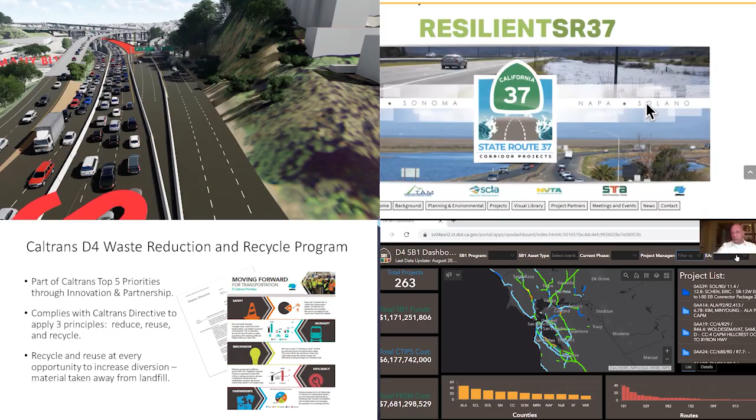24 videos have been produced by your coworkers along with the help from our very own audio and visual staff, highlighting our innovations here in the Bay Area. Every 2 years since 2012, Caltrans has hosted and showcased innovations by staff and programs in our iFair. Previously, the iFair was conducted over 2 days on the 6th floor atrium and on the streets surrounding the District 4 office building here in Oakland.

This year, due to the ongoing COVID-19 pandemic, we decided to innovate and present the iFair in a virtual platform.

Our divisions and programs have created video presentations to share on various topics like interactive web pages with scenario modeling, improved reporting and budgeting tools, enhanced partnering with other agencies for safety and early project completion like we did with the Alemany deck replacement project, greening of our building through refuse separation, pilot studies of new technologies, bicycle transportation and materials, and increased safety solutions for our roadways and the traveling public.

All these innovations were done in an effort to improve safety, be efficient with time and money, and to create solutions to new challenges our district and department have faced over the past 2 years. Enjoy the video presentations and the fact sheets provided on our iFair webpage. Keep innovating and stay safe.

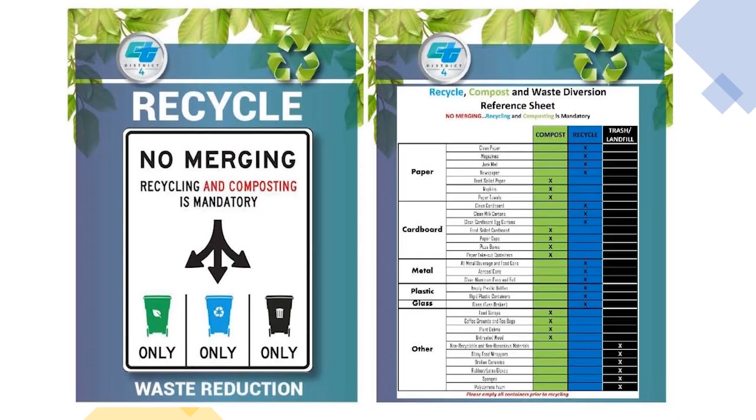The District 4 office building recycling has had a 39% increase since the start of the program. The 4.72 tons monthly recycle pre-program average has increased to a monthly average of 7.73 tons. An average of 44% of our building total waste is diverted into recycling.

Compost has been the largest contributor to our waste diversion efforts. We are averaging 29% of the building waste diverted into compost, 29% of which would have gone to landfill pre-program. Since the implementation of the program, we're averaging 73% of total waste diverted from landfill. We're in line to meet our goal to reach 75% waste diversion by the end of 2020.

The District 4 Waste Diversion Program has been a great success, but we need everyone's assistance to sustain this. We are near our 75% waste diversion goal by the end of 2020, and we can certainly achieve this goal or even surpass it with everyone's assistance and participation.

Caltrans and District 4 Facilities continues its innovation and sustainability efforts to do our part to positively affect our environment and climate change. This is one part of a larger picture, but with all of our contributions, we can continue to develop a sustainable environment for everyone.

Each county may have a different waste diversion program. Please check with your local waste management for details and information on how to extend this effort beyond our workplace.

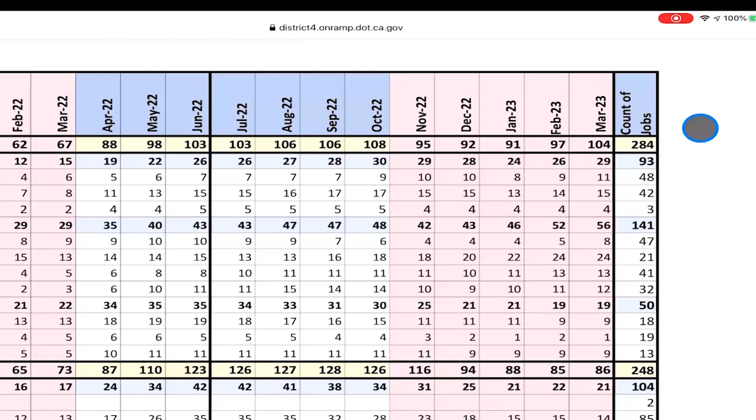The far most right column, Count of Jobs, indicates the number of current and upcoming jobs. For instance, 284 jobs are indicated for Principal Engineer Bill Borman. Bill, along with the other Principal Engineers, Bill Casey, and Bonnie Naga are shown in light colored yellow rows.

Their office chiefs and seniors are shown underneath them. For instance, under Bill Borman, we see Andrew Baskerville, Maurice O'Hege, and Kumar Santil. Under Maurice, for example, we see Surjit Bains as seniors, George Chung, Nilesh Pandya, and Maxime Dubili.

The far left columns of the report show current resource information. We have construction persons on board, loan to construction, on leave, or consultants. And for instance, for Bill Casey, we see we have 82 persons on board along with 8 consultants, making for a total of 90. We may wish to compare this to resource needs out in the future.

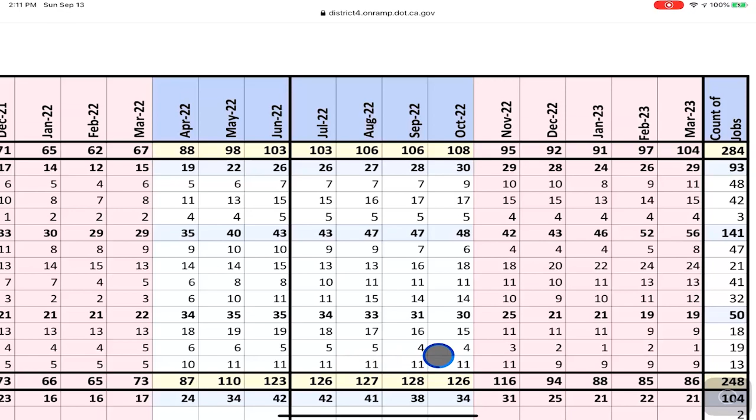On the other hand, if we look farther out and we look into the months of, say, July, August, September, October 2022, we see that resource needs are anywhere from 126 to 128, which are considerably higher than the 90 employees currently on board. Moving down the report, we see that the resource information is tabulated in the row at the bottom, D4Con Field Workload Rollup.

This includes a tabulation of all resource needs throughout the duration of the BASS. We see below that, we also have tabulated fiscal year average and seasonal average.

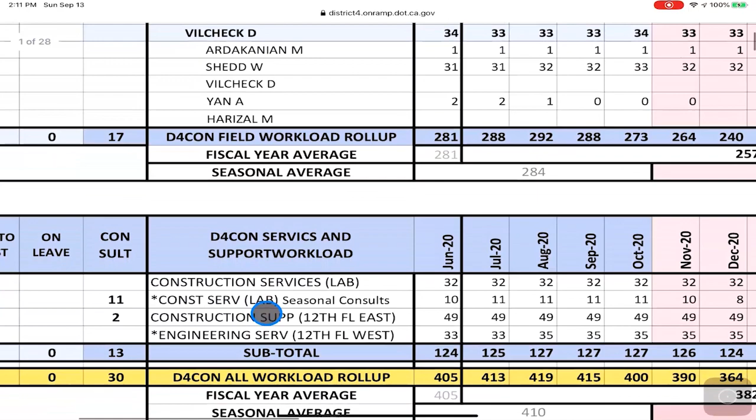Similarly, services and support information are tabulated as well in the table section below, and they are subtotaled as we can see here too. To point out, the pink in the report refers to the winter months of November through March. We see all the resource information, which includes both field work and services and support, rolled up into D4Con all workload roll-up.

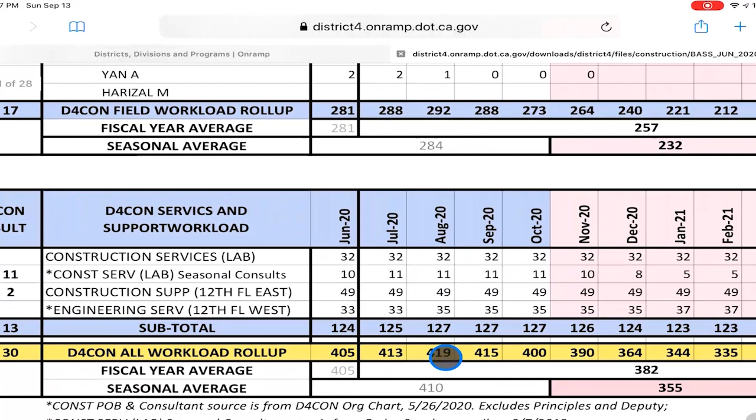A fiscal year average and seasonal average is included as well.

On the following page, we have resource information shown by project. Looking to the right, we see resource information input by seniors for the duration of the BASS from June 2020 through March of 2023.

In summary, the BASS is an online program for entering workload resource information. Its purpose is to assist field managers and staff in identifying and planning for resource needs. Ultimately, resources are allocated to meet project resource needs we identify in the BASS.

Reviewing the steps in the BASS: the D4 Workload Support Group enters new or updates existing project information. D4 seniors or their designated staff enter new or update existing resource info. D4 principals and SUPs review and approve the resource info entered. The BASS report is then generated.

The D4 Workload Support Group enters the BASS resource info into PRSM in the September through October timeframe. Resources are now allocated to projects based on the needs identified and updated in the BASS.

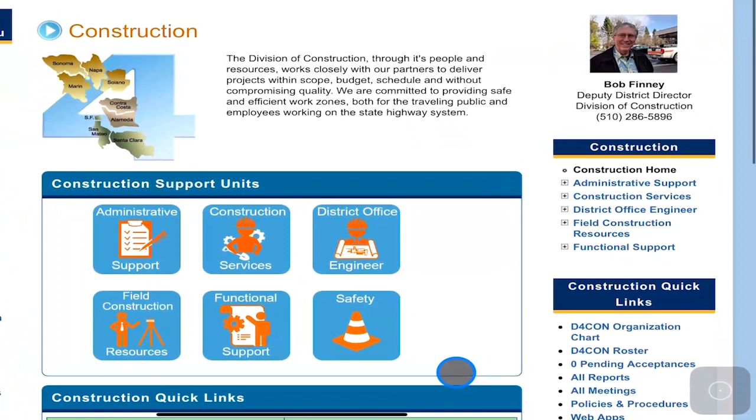Thank you very much. Welcome to the D4 Online Guidance Tool for Major Incident Reporting. We begin by navigating to the tool on the D4 Construction website. We select the safety icon and navigate under the heading During Job to Major Incident Report Required.

When a major incident or accident occurs, there is oftentimes confusion. Everyone on the site is very busy. Oftentimes the breadth of the incident is difficult to immediately make an assessment of. People can be fatigued, and almost no two accidents are the same.

For these reasons, D4 Construction came up with a simple and efficient online process for determining what kind of major incident reporting is required when an accident or incident occurs. The Major Incident Reporting tool has three major sections: immediate notification, completing CEM 0603 major incident notification, and finally a reference section. The questions in the first two sections deal with injury, damage, hazardous waste, and traffic control.

Say, for example, we are an inspector on a job site and we know that an accident or incident has occurred. We begin at the top of the form and fill out the sections under immediate notification. We look at each of the questions and answer yes or no.

We find that, say for the third question, question C, that somebody on the site did need to be brought to the hospital by ambulance, so we would answer yes. We would answer the final question, say no, regarding delays of 30 minutes or greater.

We would click on immediate action required, and the program would then tell us this is a major incident. Immediate phone notification is required.

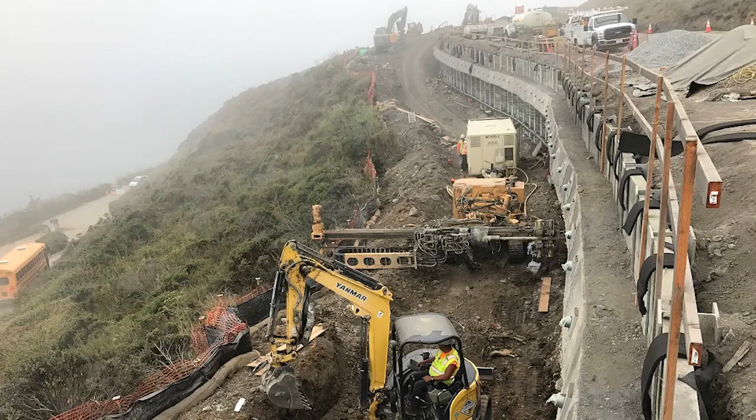The first location is on Marin 1 at post mile 8.05. Here is a picture during construction of the retaining wall and embankment confinement system, typically referred to as ECS. Next is a picture of the completed work covering the repair. Today, the reconstructed slopes have been overgrown with vegetation and have blended well with the surrounding area.

Here's another view of the same site, which is at the entrance of Slide Ranch, to highlight just how well the ECS can work at storm damage repair sites.

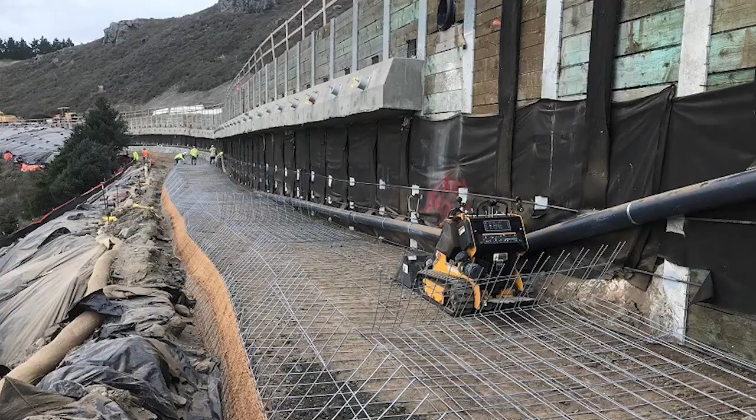The second location is on Marin 1 at post mile 10.95. The first picture shows a closer caption of the ECS and how it is integrated with the retaining wall. Next is a follow-up picture after construction showing the finished steepness of the ECS. A recent visit to this location showed that most of the vegetation has grown.

Also at this location, the general alignment of the roadway was preserved, the 4-foot shoulders were provided, smaller reflectors, typically on concrete barriers, were installed, and lastly, high visibility wet night 6-inch wide striping was incorporated to help enhance the area for nighttime driving.

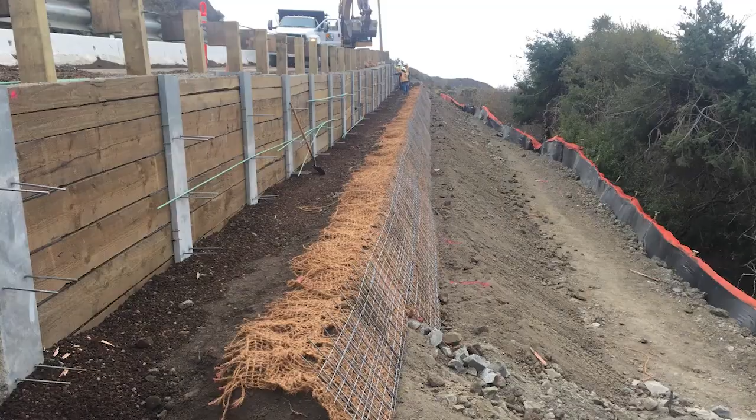The last location is on Sonoma 1 at post mile 24.2. At this site, the existing right-of-way is very close to the work area, so the use of the ECS and highway planting was valuable in helping preserve the scenic value of the area.

With the ECS covering the full height of the retaining wall, and in consultation with field maintenance staff, the cable railing was not installed. To circle back to the intent of the repair guidelines, the design features offer strategies in helping preserve the scenic driving experience and scenic qualities of the coast.

In closing, the guidelines use principles of design flexibility to promote sustainability and to build strong partnerships with environmental permitting agencies. However, the repair guidelines are not complete in the district. With leadership from Lenka Kulikaro, the core team is motivated and looks forward to completing the third and last document, the San Mateo 1 Repair Guidelines. Thank you.

Greetings, my name is Mehdi Parvini. I am the Chief of the Engineering Services, or Materials Office. The subject of my presentation is mechanistic empirical pavement design.

I will start with a general background on pavement engineering in order to explain the need for a new pavement design methodology. I will briefly explain the current empirical method and then move to the main subject of the mechanistic empirical approach. At the end, I will discuss the implementation of this method in the district.

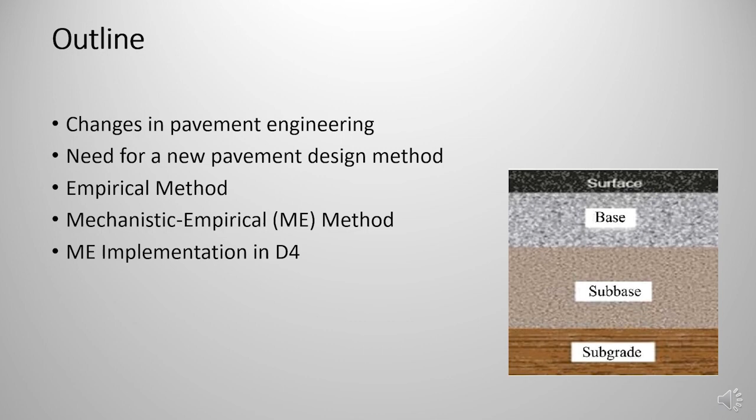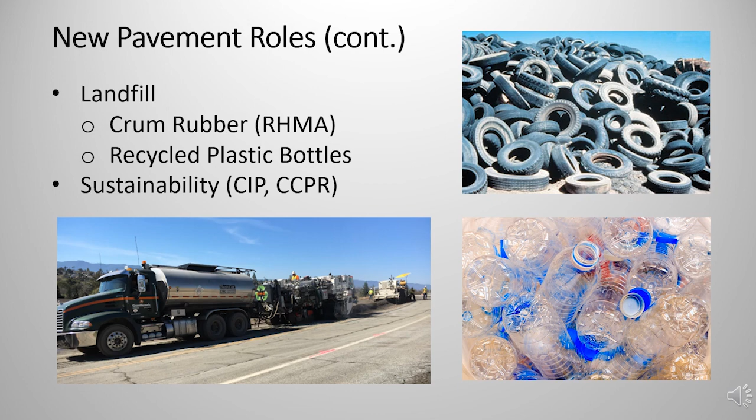Pavement engineering has changed significantly in the last century. Trucks are heavier, traffic volumes are more, and public expectations are higher. There are also new roles for highway pavements. They are supposed to be the solution to stormwater management, reduce global warming, and produce renewable energy. Pavements are also used at landfills for crumb rubber and plastic, and are considered sustainability indicators when it comes to recycling.

The method of building pavements has also evolved in recent years. Pavements could be fabricated in a plant and installed during a night shift. They could be fully reinforced or be placed in two lifts. There are also several new pavement types and materials recently introduced to the highway agencies.

All the above changes have a profound impact on pavement engineering and justify the need for continuous improvement of the pavement design process. However, pavement design has not adapted quickly with these new requirements and technology changes, and the existing empirical methods do not address any of the above developments.

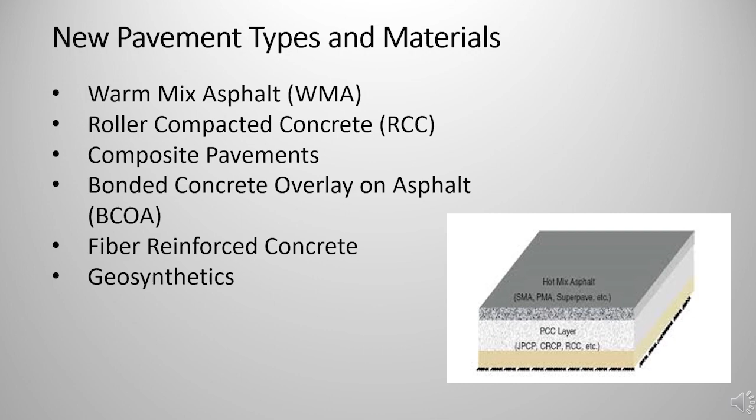So, what is an empirical pavement design? It is a design based on testing a number of pavement sections and recording their performances. Our existing empirical design method is based on the AASHO road test. By the way, AASHO was renamed AASHTO in 1973.

The AASHO road test, a $27 million investment back in 1960 and the largest road experiment of its time, was done by the American Association of State Highway Officials as a study of the performance of pavement structures. Loaded trucks were running on the test loops 24/7 for almost 3 years. The observed pavement damage of each test section was correlated to the pavement layer configuration and loading frequency.

The results from the AASHO road test were used to develop a pavement design guide, first issued in 1961, with major updates issued in 1972 and 1993. The 1993 version is still in widespread use in the United States.

As you can imagine, none of the pavement enhancements discussed earlier were conceived back in the late 1950s. This explains the shortcoming of this empirical approach.

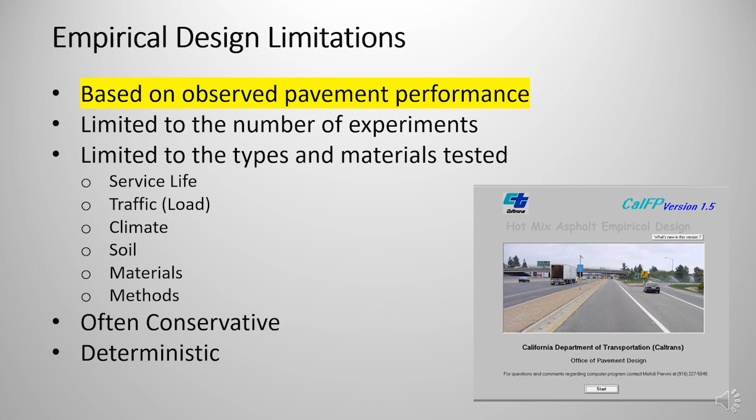On the other hand, the mechanistic empirical approach takes into account all factors affecting the behavior and performance of a pavement structure. Some of these factors are traffic, including wheel load, wheel configuration, truck classification, frequency and speed; climate, including temperature, rain, groundwater, freeze-thaw; soil, including type, strength, expansion; materials, including behavior, strength, durability; failure mechanism, acceptable damage; and reliability, which is based on probabilistic approach.

The ME method mechanistically calculates pavement response, including stress-strain deformation. However, there is still an empirical element to relate the response to the pavement damage. That is why the method is called mechanistic empirical.

While the empirical method is the main pavement design in the current version of the Highway Design Manual, the department theoretically adopted the mechanistic empirical approach back in 2005. However, it has not been practically used for day-to-day district projects. It is anticipated that the upcoming version of the Highway Design Manual eliminates the empirical method and switches to mechanistic empirical.

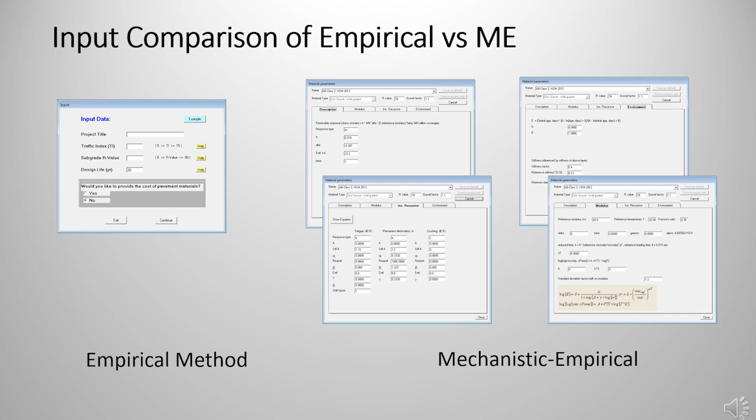As you can see in this figure, while an empirical method only requires a couple of input data, mechanistic empirical analysis needs a large amount of information to fully capture the pavement behavior.

The ME approach is still a work in progress, with lots of gaps and unanswered questions. Although headquarters is supportive of this initiative, they are not quite knowledgeable on this subject. This required a huge effort on the district side to come up with appropriate guidelines, flowcharts, and internal policies to implement this method.

An example of the ME application is the Marin-Sonoma Narrows Corridor project. MSN was one of the first projects analyzed with mechanistic empirical methods. There was a big challenge to address the budget overrun during the construction phase, so the mechanistic empirical approach was recommended to try to address the issue.

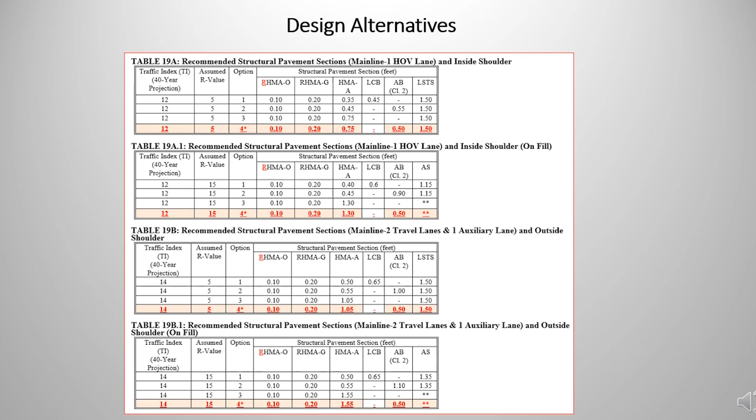Without going into the details, the next couple of slides provide a general overview of the steps involved in a mechanistic empirical analysis. First, different pavement structure alternatives were considered. Each alternative was analyzed using the mechanistic empirical tool, and alternatives were evaluated and compared for different configurations and material types.

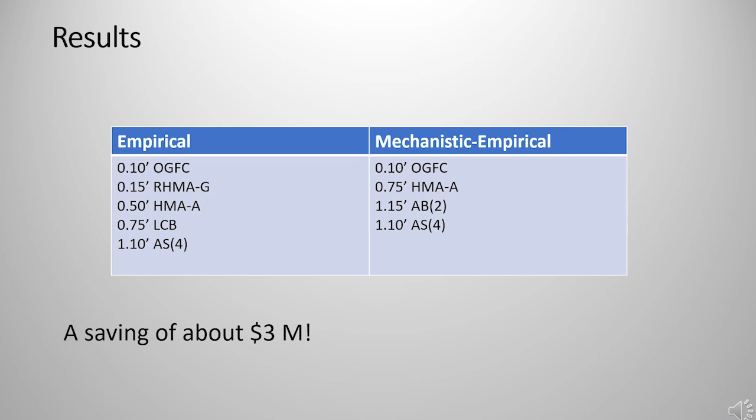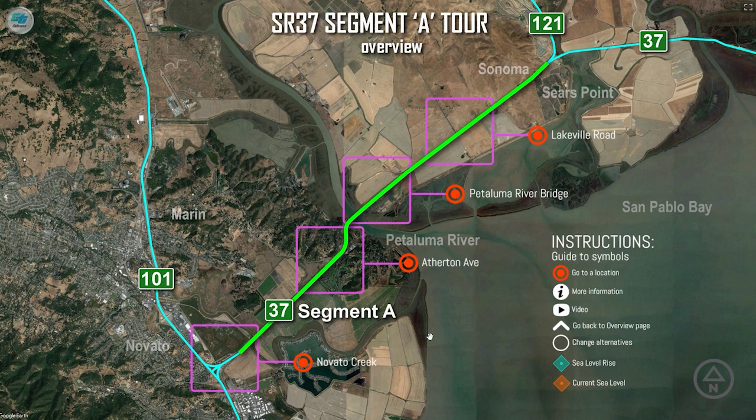In an interactive, web-based interface, stakeholders can explore proposed projects at their own pace. Users can interact with both existing conditions and proposed conditions. They can turn on simulations illustrating such impacts as sea level rise and see the inundation of the existing roadway, as well as the inundation effects on the proposed improvements.

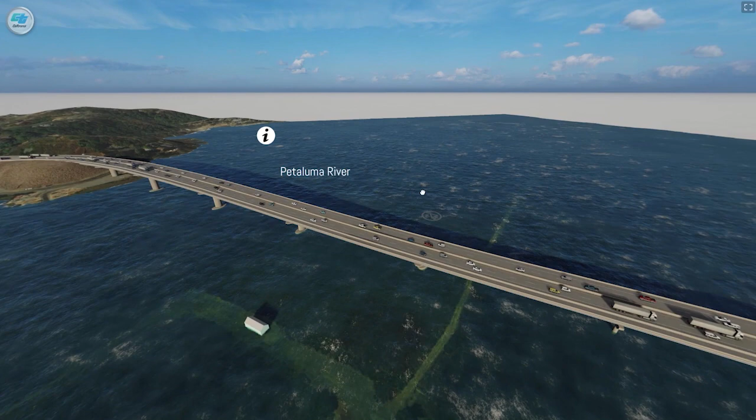For larger projects, users can move up and down the corridor to see the effects throughout the project limits. Stakeholders can also fly through design alternatives for proposed projects with video simulations that clearly illustrate design proposals.

A rural, coastal landscape of hills, ocean, scattered houses and ranch buildings, and a sandy beach where Scotty Creek enters the Pacific Ocean are the setting at the Gleason Beach Realignment Project site. A bridge spans the floodplain of Scotty Creek above the 1% flood elevation and realigns the highway east of coastal erosion projected to occur by the year 2100.

Views from public areas to the ocean are largely unchanged. However, the bridge changes views to the hills. Visual contrast with the rural setting is reduced by coloring the bridge to blend with muted, earthy tones of the beach, using see-through bridge rails, and by painting metal rails to harmonize with coastal colors. Help select paint color for rails by reviewing options on the project website and submitting your comments.

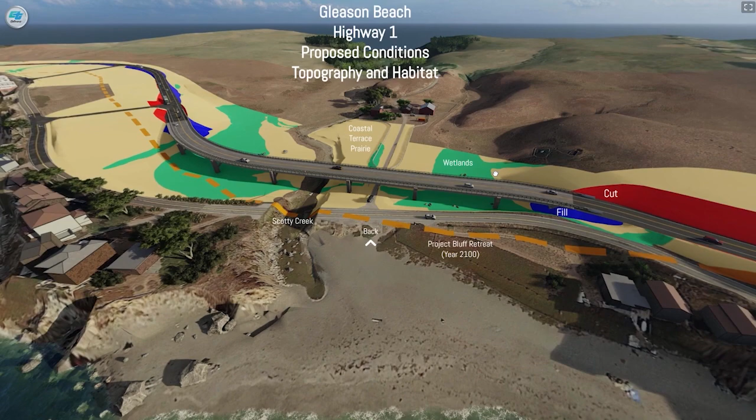In a time of social distancing, this virtual experience allows us to make our outreach, communication, and engagement more effective than ever. Stakeholders can zoom into specific areas of interest, click links to see various project alternatives, and view video simulations from a driver's perspective or from the air.

By integrating GIS mapping, state-of-the-art rendering tools, and a web-based platform, the Office of Landscape Architecture has created an experience with a simple interface that is both flexible and scalable for various project types and user groups.

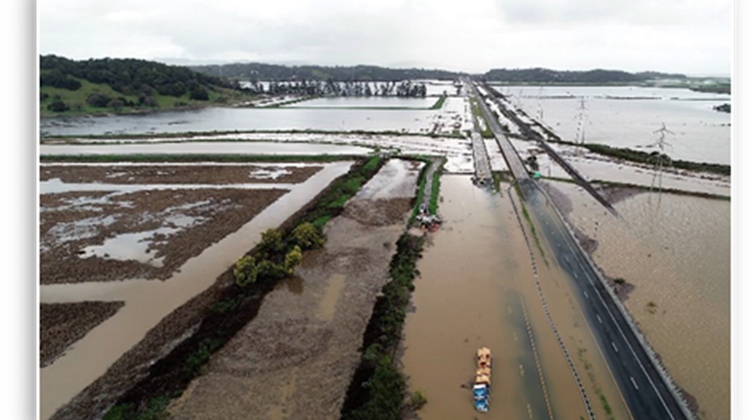With low elevations and proximity to the bay, State Route 37 is highly vulnerable to near-term flooding, as demonstrated by recent flooding and highway closures in 2017 and 2019. With anticipated sea level rise, the frequency of flooding is expected to increase, with most of the existing Route 37 likely to become permanently inundated by the year 2050, thus cutting off a major regional transportation route.

Caltrans, along with MTC and the 4 North Bay Area transportation agencies, has been proceeding with the development of immediate, interim, and long-term improvements. During this process, Caltrans has received requests from several regulatory agencies and stakeholders on the need for a broader cumulative and corridor assessment of sea level rise, ecological restoration, multimodal needs, access to baylands, and equity issues.

The SR 37 PEL study will be Caltrans' answer to a corridor assessment addressing these concerns. But before we go too far, let's look at what a PEL study and its associated process is intended to accomplish.

The PEL process is a voluntary, flexible, collaborative planning process. It examines broad transportation, environmental, community, and economic goals early in the planning process. PEL process starts early, beginning before environmental processes focused on specific projects take place. It establishes buy-in from agencies and stakeholders on a corridor vision, purpose and need, range of alternatives, and consideration of key environmental issues. PEL gathers preliminary data and considers conceptual level of design, traffic analysis, and evaluation of environmental impacts.

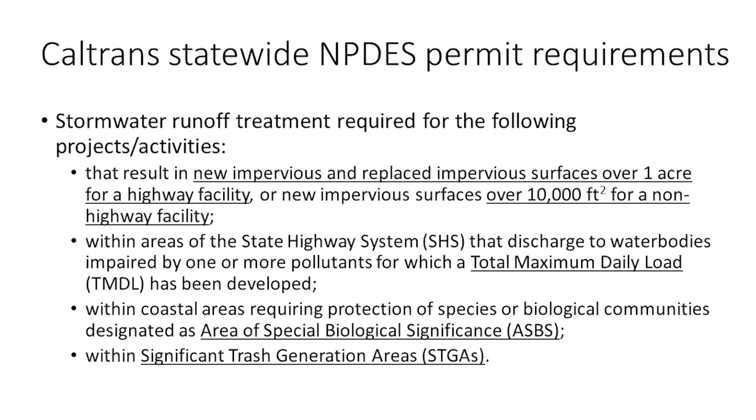It also includes coastal areas that have been identified as areas of special biological significance and areas within significant trash generation areas. So all these areas require stormwater treatment. Caltrans integrates best management practices into its daily operations, including project development, construction, and maintenance.

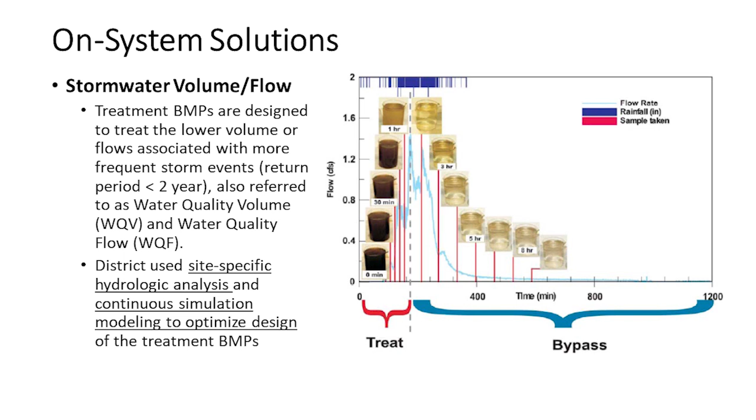BMP implementation strategy for on-system solutions uses site design principles and conventional treatment BMPs. On-system solutions are solutions that are implemented on the highway right of way and require that the treatment BMPs are designed to capture the water quality volume and the water quality flows. These are associated with more frequent storm events as shown in the hydrograph. The rising limb of the hydrograph represents what we call the water quality volume, or an equivalent water quality flow.

The district uses site-specific hydrologic analysis and continuous simulation modeling techniques to optimize the design of the treatment BMP so we can fit them within the available space.

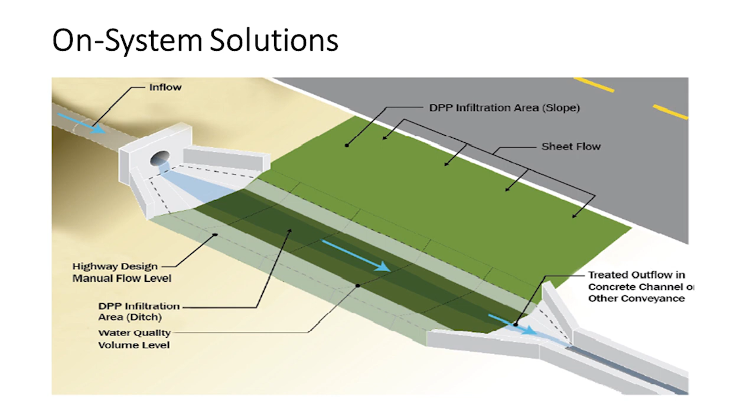On-system solutions involve site design principles, and these principles incorporate sustainability into the design process to maximize the infiltration of water quality volume and water quality flows. This involves conserving natural areas, minimizing disturbances to natural drainages, and taking into consideration the pervious areas, soil conditions, slope, and climate-appropriate landscaping that minimizes irrigation and runoff.

On-system solutions also require consideration of pervious pavement where feasible, to promote infiltration through the pavement and underlying soils in a manner similar to infiltration devices. These are considered essentially in landscape areas, gore areas, parking lots, park and ride areas, maintenance access roads, and maintenance vehicle pullouts. Also, open graded friction course needs to be considered as part of the site design principles.

OGFC has been used as an effective paving material for the reduction of noise and to reduce the spray from rainfall on the highway surface for better visibility during rain events. It is designed to have a large number of void spaces in the compacted mix, and it's effective in removing pollutants. Both pervious pavement and OGFC are considered self-treating areas and are exempt from stormwater treatment requirements.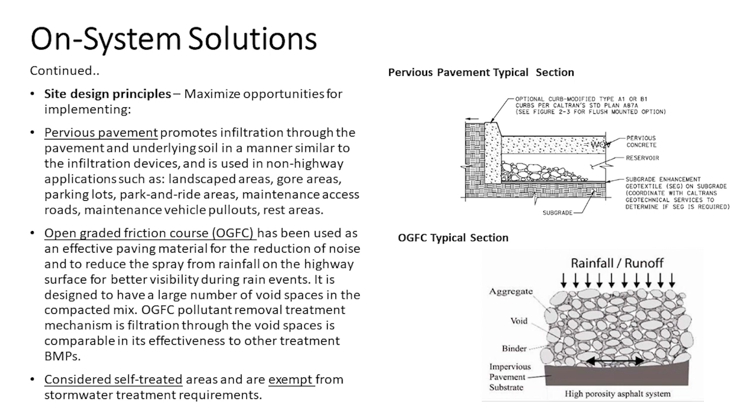On-system solutions require consideration of conventional treatment technologies, where a low-impact development approach is used to employ a variety of natural and engineered BMPs to facilitate infiltration of runoff into the ground. Treatment BMPs include infiltration devices, detention devices, biofiltration, bioretention systems, and other devices that are approved for installation on the state highway system.

As we consider technical feasibility of these devices on the state highway system, Caltrans must be able to implement these BMPs within the context of the state highway system, taking safety into consideration. Proper consideration is given to clear recovery zones, setbacks from structures, and maintenance access roads and ramps. Any devices that require extraordinary plumbing to collect and treat runoff may be considered infeasible.

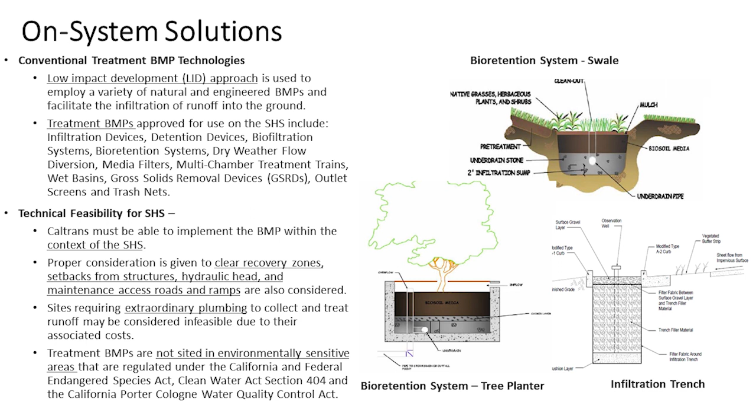Also, treatment BMPs are not sited in environmentally sensitive areas that are regulated under the California and Federal Endangered Species Act, the Clean Water Act, and the California Porter-Cologne Water Quality Control Act.

The challenge with on-system retrofits is that the state highway system is a linear infrastructure with a narrow right-of-way, limiting the feasibility of on-system solutions. This increases the potential for stormwater treatment deficits and non-compliance with the NPDES permit.

To address the challenges, the District will continue to optimize the design of on-system solutions using site-specific hydrologic studies and continuous simulation techniques to fit the treatment BMPs within the limited right-of-way. We will also engage with local partners and stakeholders to develop watershed-based solutions off the state highway system to meet our compliance needs.

The opportunities we will explore include sustainable green infrastructure projects. Caltrans will financially contribute to project costs, and local partners take on maintenance costs. To date, the district has developed over 20 local partnerships beginning in 2007 to fund construction of green infrastructure projects that treat over 1,700 acres of state highway system right-of-way, providing a clear path to cost-effective compliance.

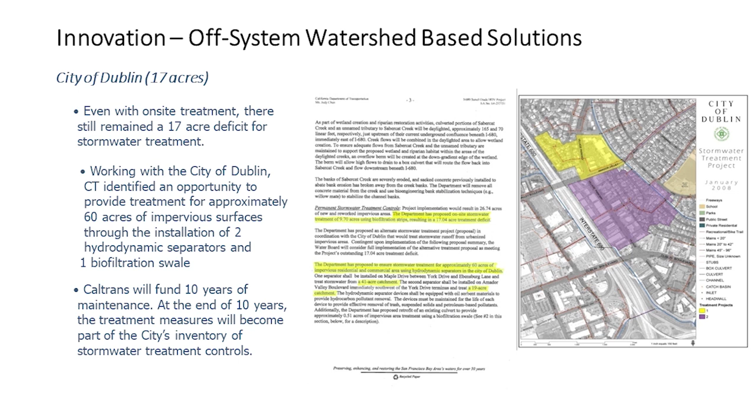This is an example of an off-system watershed-based solution that District 4 entered into partnership with the City of Dublin. The I-680 Express Lanes project had a 17 acre stormwater treatment deficit. We partnered with the city to implement 2 hydrodynamic separators and 1 biofiltration swale to treat 60 acres of impervious surfaces. The agreement required Caltrans to reimburse the city for all project costs, including 10 years of maintenance.

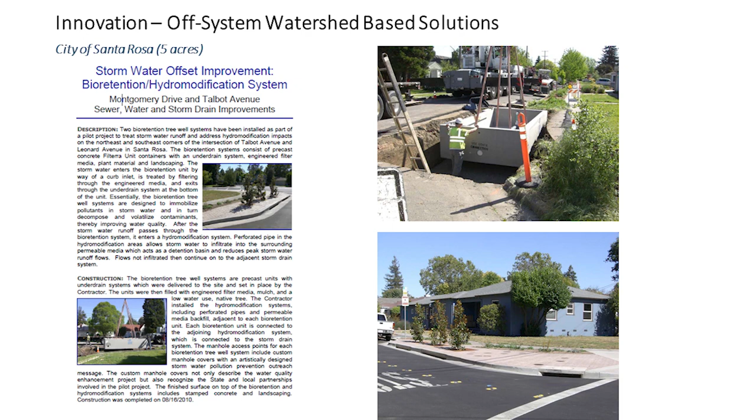This is another example of an off-system watershed-based solution implemented in partnership with the City of Santa Rosa, County of Sonoma, and Sonoma County Fairgrounds to address about 17 acres of stormwater treatment deficits on the Sonoma 101 corridor project that ran through Santa Rosa.

Another example of an off-system watershed-based solution: we partnered with multiple cities along San Pablo Avenue to implement the San Pablo Avenue Green Spine project that treated 8 acres of impervious surfaces. This was to offset the 12-acre deficit on the San Francisco-Oakland Bay Bridge project.

The last example of an off-system watershed-based solution involved a partnership with the City of Richmond to treat 30 acres of Caltrans right-of-way using a continuous deflective separation unit that complied with NPDES permit requirements for trash reduction.

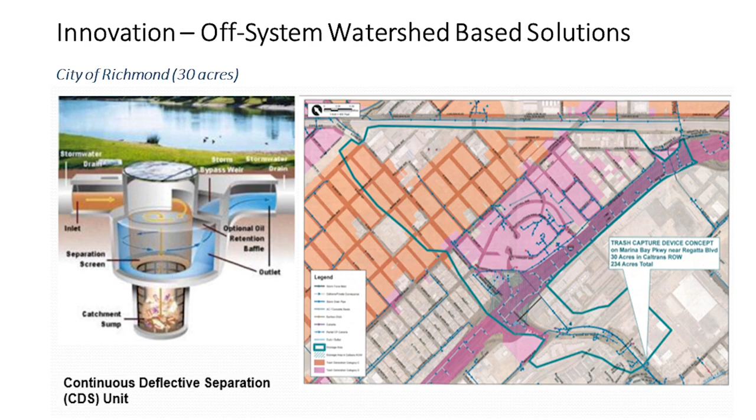For innovation, the district will continue to optimize the design of on-system solutions using site-specific hydrologic studies and continuous modeling techniques to fit the treatment BMPs within the limited right-of-way, and also partner with local municipalities and other stakeholders to develop cost-effective watershed-based solutions. This concludes the Stormwater Management on-system solutions and off-system partnerships portion of the iFair 2020.

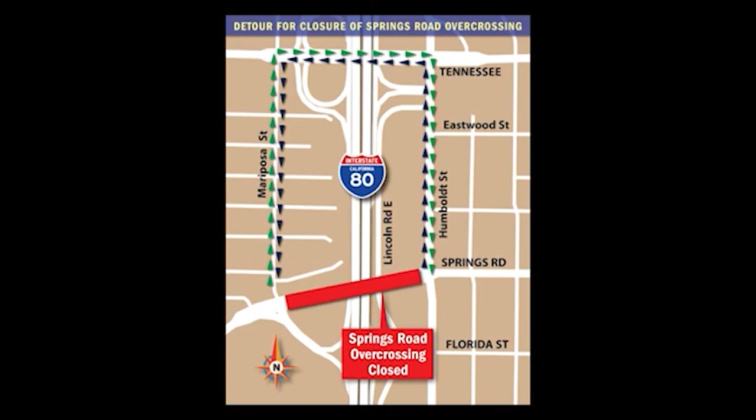Our team answered the challenge of reaching our second language audience by producing short project information videos and making them available on our website. For example, in Solano County, our team is gearing up to start an Interstate 80 Six Bridges project in the city of Vallejo. This prompted us to think outside the box and create outreach videos in several languages.

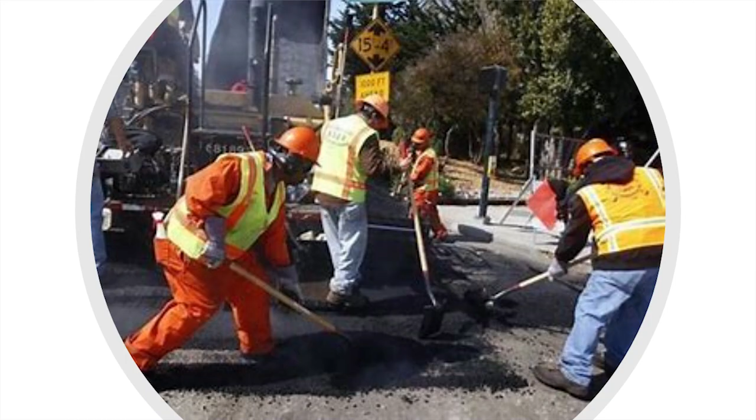Now, many of these local assistance projects are very similar to each other: road rehabilitation projects, pedestrian safety projects, bicycle network projects. District 4 local assistance may get to see 70 to 100 of these projects every year, and so we became very familiar with what the environmental impacts are likely to be, and therefore what mitigations can appropriately be proposed. An important thing to remember about NEPA is that the mitigation has to be commensurate with the scale of impact.

So, here in District 4, we pooled our knowledge. When you are looking at NEPA, you want the project sponsor, in this case, the local agency, to really own the mitigation. It's their project, it's their road and a bike path and sidewalk. Through NEPA, we encourage them to think about what's the environmental impact of what they are building, and what mitigation should therefore be proposed. But at the same time, we recognize that we in Caltrans Office of Local Assistance hold the information about what every other local agency is doing in similar situations.

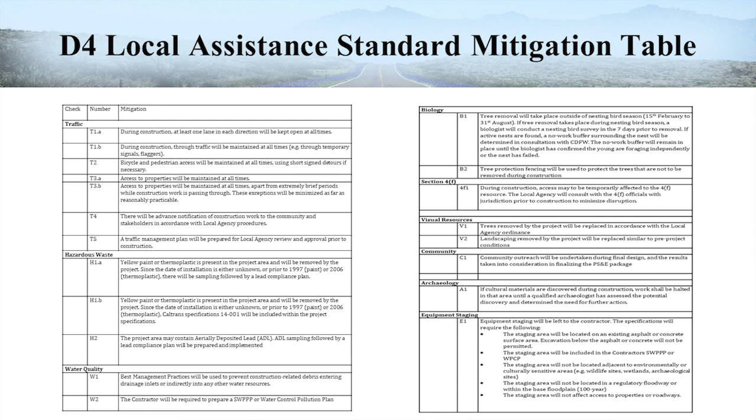So, for smaller projects that we call having a categorical exclusion from NEPA, it makes more sense for us to provide the local agency with a standard list of possible mitigations, a list from which they can pick the ones that apply to their project, and they can modify them as necessary, so they still own the mitigation.

It really reduces the number of studies the local agencies have to carry out. We could tick a box without studies on our preliminary environmental study intake form. The amount of paperwork local agencies have to submit to Caltrans gets reduced, and we could deliver their NEPA approval faster, allowing projects to move into construction quicker.

We rolled this innovation out in November 2019 at a meeting with all the Bay Area local agencies. Almost a year later, we've probably handled about 15 to 20 projects using this new methodology, and so far, the feedback from our customers, the local agencies themselves, have been great. In fact, we're actually finding that we put more mitigation down on our environmental documentation than we did before. It's a win for the environment, a win for efficiency, and a win for the local agency.

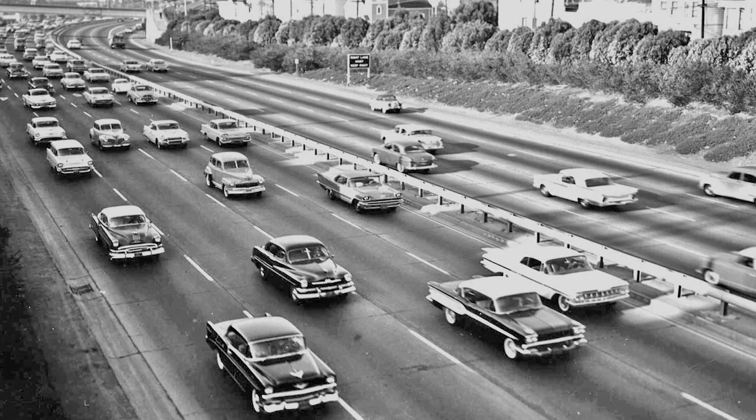This is U.S. Highway 101 in San Francisco at Alemany Circle. Built in 1950, this busy freeway has been carrying traffic for nearly 70 years. Hi, my name is L.B. Lee, and I am the project manager for the US 101 Alemany Deck Replacement Project in San Francisco.

The Alemany project had significant challenges for both the City of San Francisco and Caltrans during the design phase. The goal of the project was to construct this deck as fast as possible, but yet mitigate traffic on the local streets as well as on the freeway system. The stakes were high, and there were many innovative solutions developed. The lead-in video excerpt you just witnessed was the single most influential tool to gain support for the project. Little did we know at the time that this project would become a construction inspirational opportunity in 2020.

The project had the disposition to be located within the heavily used US 101 and I-280 interchange and was in the middle of San Francisco. The project site is at the crossroads of 4 prominent neighborhoods, one of which is a residential neighborhood located on the steep hillside overlooking the project site. The other 3 sides are bounded by local arterial streets serving residential and commercial districts. The delivery team partnered with SFMTA's technical staff and developed innovative traffic detour plans to address all modes of transportation.

On the freeway mainline, the complex detour stages included a contraflow movement shifting southbound traffic to the newly constructed northbound deck during the second half of construction.

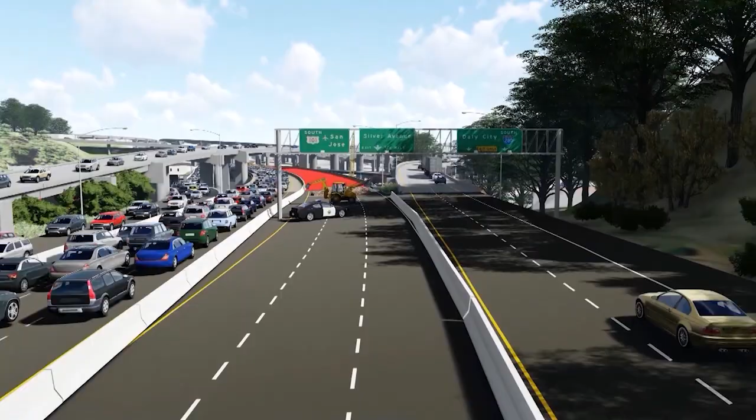It was incumbent that the delivery team embarked early in 2019 on a comprehensive Bay Area-wide transportation demand management strategy, partnering with local public transportation providers BART, San Francisco Bay Ferries, Caltrain, Samtrans, and Muni, and encouraged telework, a term we would become all too familiar with this year.

The project needed an experienced and motivated contractor that would accept the risk and the rewards of a 24-hour-a-day, 7-day-a-week production. CMGC was considered, but we met our goal using the low bid process of a traditional design-bid-build contract. Our strategy enticed experienced contractors to compete by allowing a maximum 18-day construction period.

It was anticipated that the $1 million incentive per day, capped at 8 days, would attract the best contractors to consider their own innovative means and methods to bid the incentive down in a competitive bid process. Four contractors submitted bids in January 2020. The low bid from Myers & Sons Construction was 25% below the engineer's estimate.

With our contractor on board and the TDM campaign in full swing, the unthinkable happened in March 2020. Our district director, Tony Tavares, met the moment to take advantage of the low traffic volumes in the Bay Area and challenged the team to deliver the project earlier and faster.

I'm standing right above the Alemany project, which is an extremely phenomenal project that all of you, our Caltrans Bay Area team, were able to advance and deliver ahead of schedule. I want to thank all of you, all the employees, all of the programs and divisions that helped bring this project to success.

We took a project that was supposed to be completed 3 months from now and brought it into a 2-week period. Within that 2-week period, we had a contractor that was able to construct it in less than 9 days. That's amazing. I want to again thank all of you for your hard work, your many hours of commitment and dedication to getting this project completed.

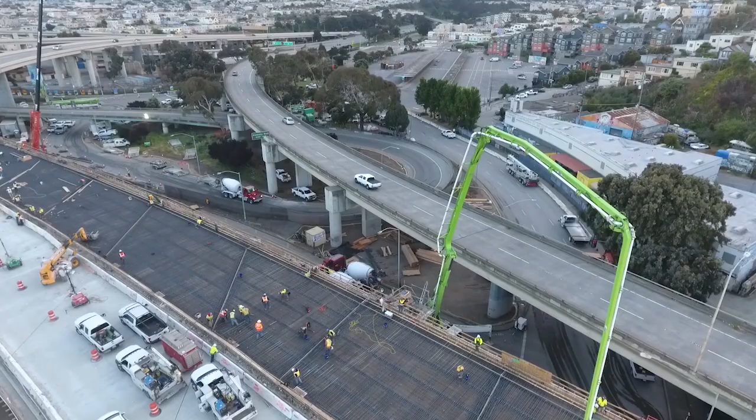It's one of the most heavily traveled corridors in the Bay Area, connecting the peninsula to downtown San Francisco. More than 240,000 vehicles drive U.S. Highway 101 as part of their daily commute. Caltrans District 4 had planned to improve the highway by replacing a 70-year-old deck above Alemany Circle this summer. The construction date was set in July, but with Governor Gavin Newsom's stay-at-home order in place and fewer Californians on the road, Caltrans used the opportunity to move up this critical infrastructure work from July to April.

We took that opportunity because of the shelter-in-place in San Francisco and the Bay Area. Caltrans actually saw a decrease in the volumes of traffic. Long story short, 3 months of preparation, we basically did it in 3 weeks.

Caltrans knew that in order for the Alemany project to be successful, we would need to have direct communication access to the public. We would also need to be able to partner with our local partnering agencies.

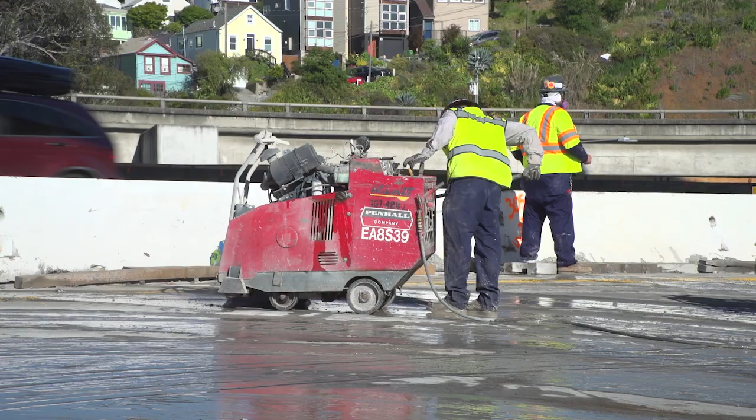Crews worked around the clock with saw cutting and ripping out the old 800-foot deck. Within just a few hours, crews were already building a new bridge deck with reinforcement steel and fresh concrete.

While the construction was underway, Caltrans adopted Centers for Disease Control (CDC) guidelines to combat COVID-19 by asking employees to practice social distancing, wear a face mask, and wash their hands.

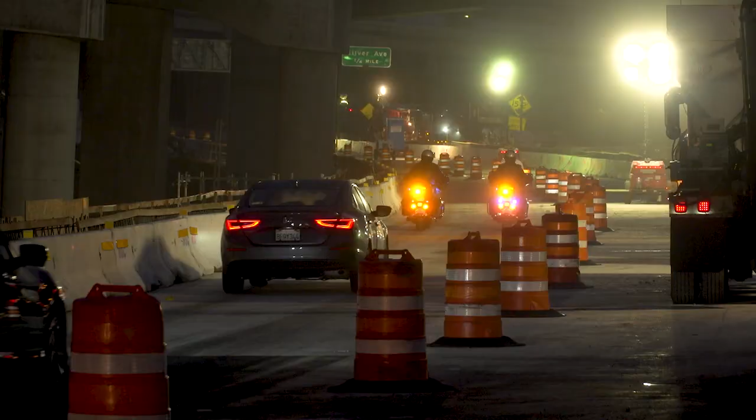The San Francisco Municipal Transportation Agency positioned parking control officers who were vital in making sure traffic flowed smoothly and safely through city intersections near the project. California Highway Patrol also played a key role in making sure drivers were reducing their speeds through the project site and being work zone alert.

Director of Caltrans Toks Omishakin and District 4 Director Tony Tavares recognized the importance of this project. Omishakin and Tavares toured the construction site and provided moral support for employees working during this pandemic.

We worked with a contractor who is very innovative. We were able to take that 18-day working day period and condense it into less than 9 days. That's pretty amazing.

There goes the CHP. And our first vehicles. Southbound freeway is now open for the Alemany project.

The Alemany project was a well-executed project, constructed safely and about as fast as humanly possible. It was a total team effort between the Department of Transportation, the California Highway Patrol, the City of San Francisco, and the highway industry. It was an amazing journey and had a fairy tale finish. Thank you for watching.

Hello, my name is Jun Kang, a Regional Project Manager for Caltrans District 4, in charge of Santa Clara County. I'd like to take this opportunity to showcase the partnering success in CAL FIRE's shaded fuel break along Highway 17.

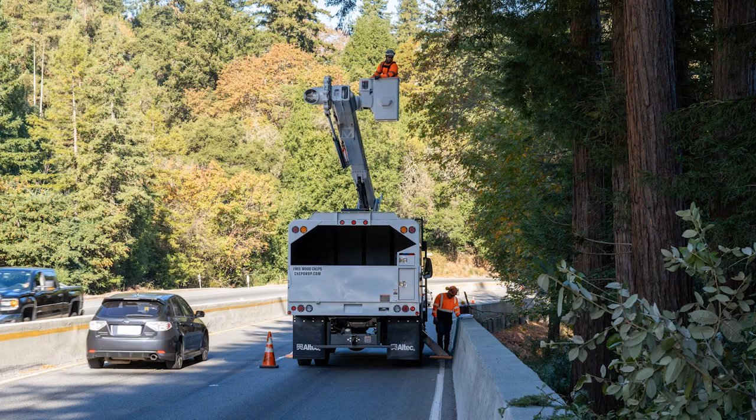Highway 17 is a primary transportation corridor between Santa Clara and Santa Cruz counties, with an average daily usage of more than 80,000 vehicles per day. This narrow mountainous highway was built in the 1940s. The highway has few turnouts, but no roadside shoulders or center median.

The surrounding vegetation is a mixture of dense second-growth redwood forests, conifer oak woodlands, and brush fields that encroach within a few feet of the pavement. These forests have decades of accumulated downwood and thick brush.

This shaded fuel break treated 494 acres in Santa Clara County in 8 surrounding communities with affected population of 72,462.

CAL FIRE, Santa Clara County Fire Safe Council, and Caltrans collaborated efforts with multiple public agencies at the state, county, and local levels, and with private landowners and contractors to establish shaded fuel break along Highway 17 and surrounding communities. This shaded fuel reduction operation along Highway 17 was treated as an emergency incident response, and an emergency incident command structure was employed to execute the operation.

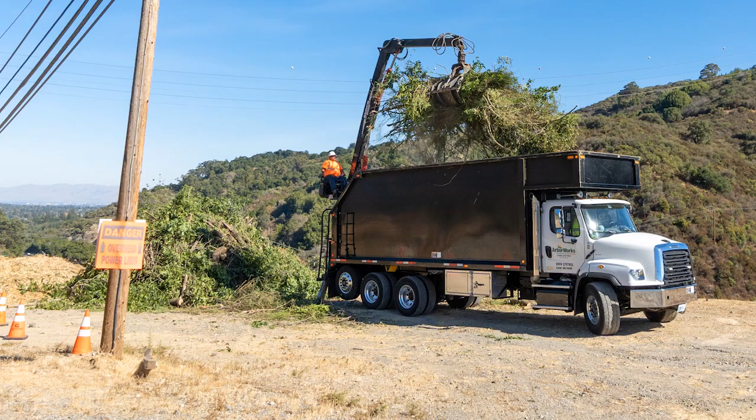We used masticators where possible to remove vegetation. However, most of the work required handwork. Removed fuel from slopes were transported to roadside by hand, loaded onto a truck, delivered to field operation yard, processed, and hauled away.

The erosion control measures were applied after the fuel reduction operation for slope protection. Hydroseeding included native flower seeds to provide cover for the bare soil and to beautify the roadside.

The fuel reduction operation significantly reduced the intensity of a fire and dramatically slowed its rate of spread, so that firefighters can safely and quickly control the fire before it threatens homes and motorists.

With the declaration of a state of emergency, the shaded fuel break operation received CEQA suspension. However, the project team adopted an intensive environmental monitoring program to uphold the highest environmental standards. Biological, cultural, forestry, and water quality monitoring, construction site best management practices, and continuing field staff training were performed to keep the project over and beyond CEQA requirements.

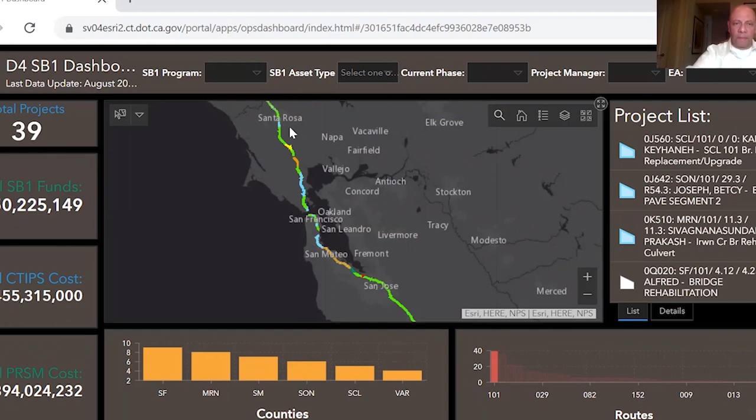Total SB1 funds on those 39 projects amounts to $550 million, and the total CTIPS cost, programmed amounts, and the total PRSM cost amounts. So as you could see, you got the answer fairly quickly. Let's try one more question. For that, let's refresh it again.

Let's say we want to see how many TMS projects are currently ongoing in District 4. So for that, we're going to toggle down to TMS, Traffic Management Systems. And as you can see, we have 20 projects that have a total SB1 funds of almost 39 million. And again, the total project cost for CTIPS and PRSM.

So as you could see, from a few simple questions to more complex questions that we need answers to, the tool lets us view and analyze the data quickly and make decisions as appropriate or take actions as necessary. So hope you enjoyed this walkthrough of our District 4 SB1 dashboard, and we hope you can make use of it in the future. Thank you again.

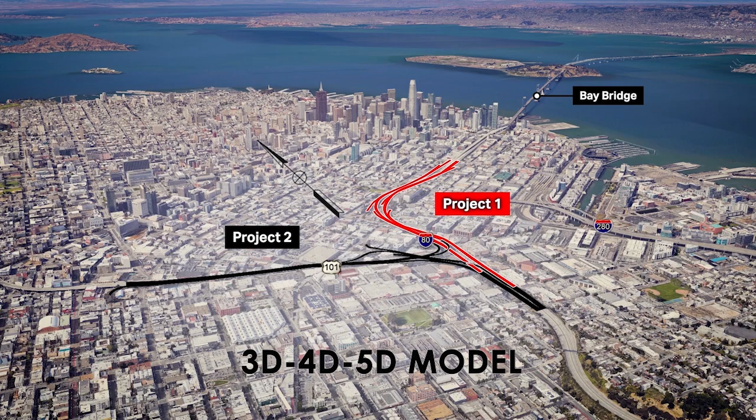The title of this innovation is 3D, 4D, and 5D dimension model. This tool is a new innovation to the project delivery team that saves much time, money, and enhanced safety. It shows the proposed project in 3D design based on the engineering data, combined with the proposed construction schedule.

4D, which is the time, is a way to detect and resolve construction conflicts, combined with the cost and cash flow to know how much fund is needed and when it is needed through the 5D or the 5th dimension, which is the cost. This tool will save time by minimizing rework effort, reduce cost by minimizing contract change orders for projects during construction.

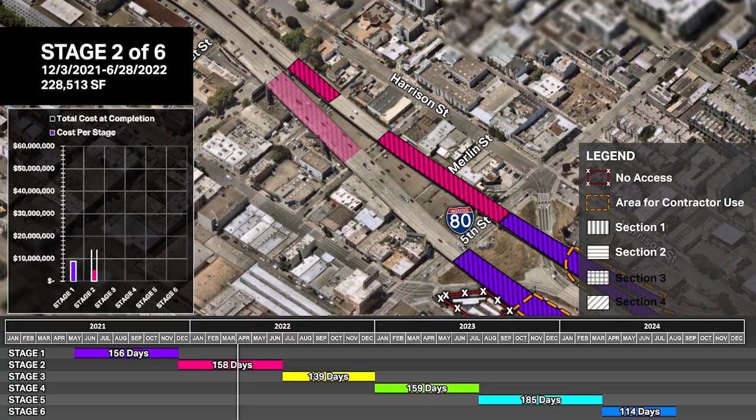It allows designers to detect and resolve conflicts during the design phase, review safety measures, and also forecast cash flow in a way that the department's programming and local agencies will be informed about the fund need timetable.

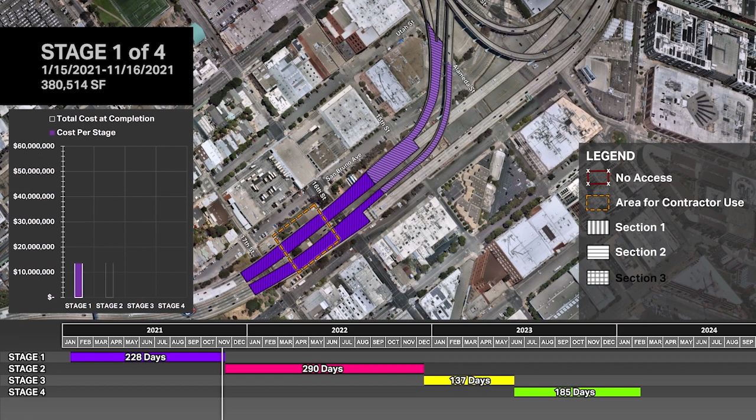This engineering tool can produce various videos for the target investigation under question. Those videos can be for individual project stages or specific phases, and can be a tool for the PDT team or focus meetings. It can also be presented for stakeholder meetings, contractor outreach, and for the general public.

The good thing is that this tool can be updated as we go through the project phases. It can start as soon as we have the surveying data for the 3D model and get updated during design phases for the project stages, tied with the estimate as they are developed, and during the construction phases, where it assists the construction team in their discussion with the contractor and the PIO for outreach.

Hi, I'm Jeff Weiss from Caltrans Public Information, and I'm here to talk to you about the State Route 37 website. This is a comprehensive website that includes many projects that are going to be built on State Route 37. So let's take a look at the website.

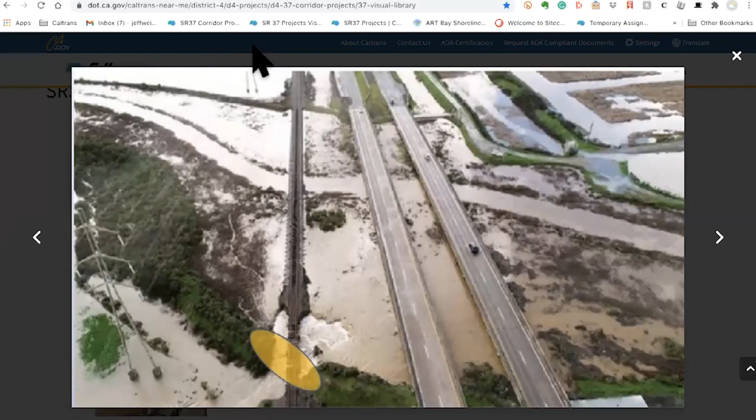Let's take a trip to the visual gallery. And here we have a picture of the flooded road and water everywhere. This is actually a couple of days after the flooding, perhaps a week. So let's go and take a look at another image. Go back to the image gallery, the visual library.

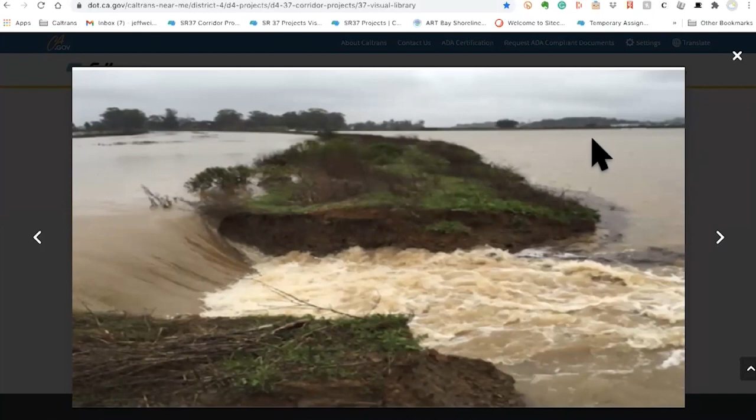And we can see the culprit right here. Here we have Novato Creek. Well, it doesn't look like a creek, does it? The creek was so swollen with rain that it flooded this large field and pushed on this levee so hard that it breached the levee and flooded this field. And in turn, the water from that field washed up on Highway 37. This is several days after the water had washed onto the roadway. A lot of it had been pumped out. The road was closed for 3 days and then closed at nights after that to repair the road and repair the levee.

So in the visual library, there will also be other pictures. We're not just going to show you the flooding. There'll be pictures of construction as the project proceeds.

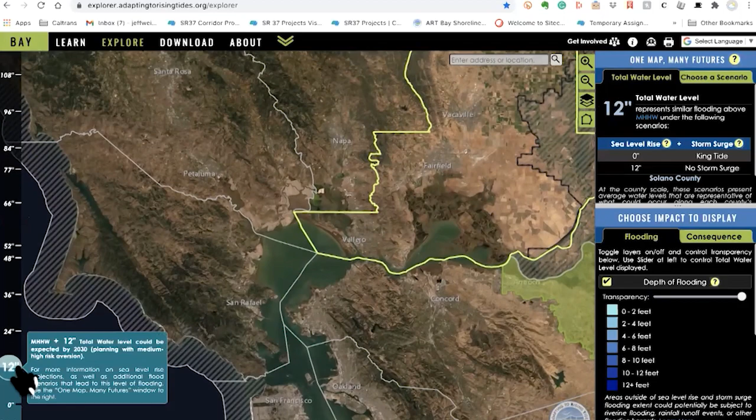So we talked about sea level rise. Let's take a look at the sea level rise. We go to the visual library again. How bad will it be? Let's take a look. So this is what it looks like right now. Route 37, which travels along the San Pablo Bay. And if we were to get a foot of sea level rise, we can see the flooding. And here's Route 37 again. And the Route 37 will be underwater.

Now, if we really take it up to 52 inches, we can see what a disaster that would be. And not just there, but throughout the lower San Francisco Bay. So the lower San Francisco Bay and the upper San Francisco Bay would be in grave trouble during a sea level rise of 52 inches. But even so, just 12 inches is going to cause some real concern in these areas. And you can go to this map on the website and look at your own home if you'd like to.

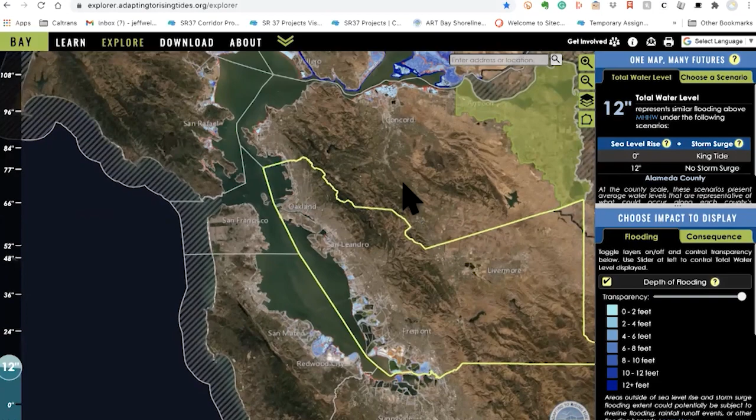Thank you for visiting and hearing about the State Route 37 project. I would welcome you to get on the site yourself and browse. There's a lot of information there, and I think it will be very helpful as the project progresses and people want to know more and find out what's in the future for this important route that travels along the North Bay of the San Francisco Bay. Thank you very much for listening. I appreciate it.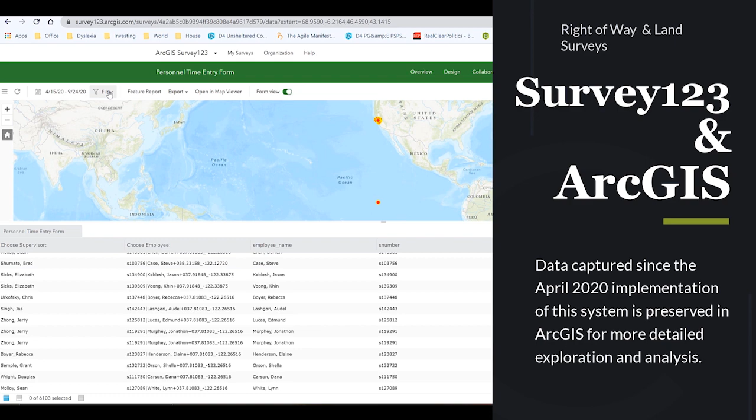Data captured since the April 2020 implementation of the system is preserved in ArcGIS for more detailed exploration and analysis. Within ArcGIS, the data can be viewed in its entirety or filtered by important values like supervisor, employee, or date.

Alternatively, the data can be downloaded and imported into other programs for analysis and processing.

A great irony of the information technology era is that paper consumption has increased. Paper production is environmentally unfriendly. Not only does it waste water and other resources, it also wastes time.

Which begs the question, why do we require requesters for land surveying services to print and lug about so many files? It certainly doesn't make for efficient intake, processing, or tracking of requests. Paper-based procedures bound both the requester and the survey coordinator to an archaic process centered on a single physical inbox.

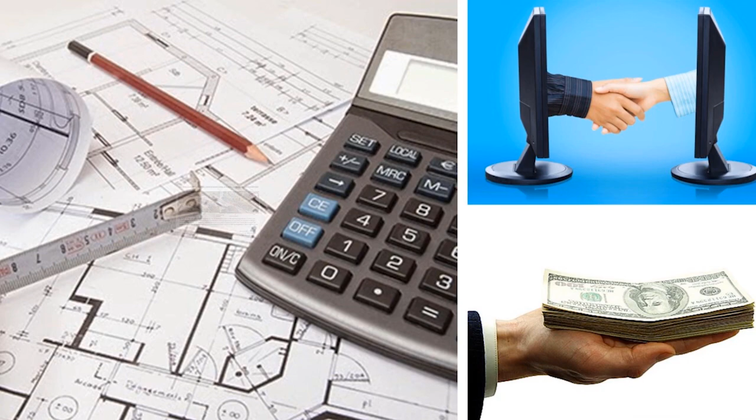A copy of the request package and research are sent to the survey field office responsible for the region where the project is located. A detailed estimate is prepared and returned to the coordinator.

Assuming the schedule and level of effort are acceptable to the project manager, the survey coordinator confirms that hours have been loaded into PRSM.

Finally, with agreement on the scope and cost, a notice to proceed is transmitted to the project team.

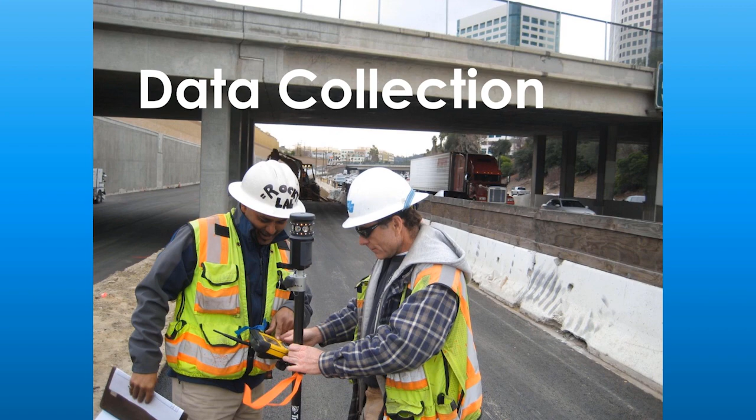Field Surveys collects and prepares the data for electronic delivery to the surveys processing group in the district office.

Highway features are extracted from the collected data, quality checks performed, and a final digital terrain model created. The final digital terrain model and associated line work is delivered to the project folder and the project team notified by email.

Each step in the survey request process is tracked and visualized in a data dashboard. Within the dashboard, the survey coordinator can quickly locate and retrieve information indicating where a given request is in the process.

Utilizing linked graphics, he or she can filter workload by survey field office or by survey milestone.

Data collected on each survey request as it proceeded through the process can be downloaded and analyzed using other software applications. Patterns detected in that data could be used to identify and reduce sources of waste and delay.

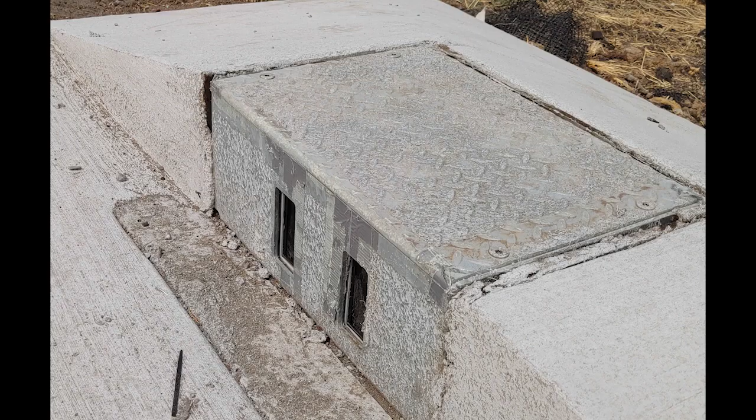TURTLE is a non-intrusive traffic surveillance system utilizing infrared technology capable of providing precise measurements of traffic flow on our freeways. The TURTLE assembly consists of a transmitter installed in the freeway center median barrier and a receiver installed on the freeway shoulder directly opposite the transmitter.

Both the transmitter and receiver are housed in rugged, high-strength stainless steel enclosures, protecting it from the harsh freeway environment. The transmitter is the source of 4 infrared beams, 2 parallel and 2 cross, which travel across the freeway to the receiver, perpendicular to the flow of traffic.

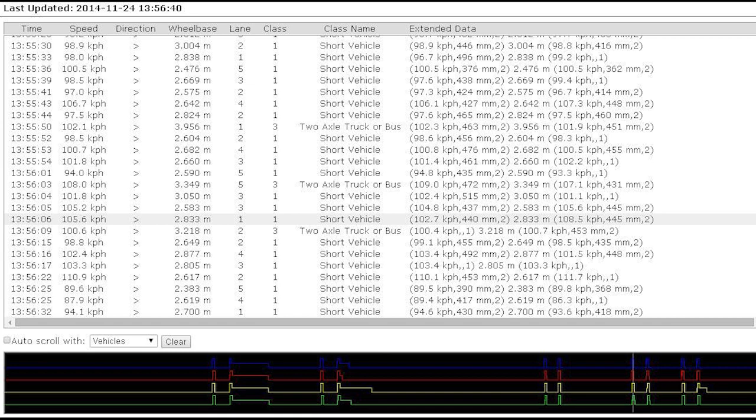When vehicles intersect the turtle's infrared pathway, the wheels of the passing vehicles block the beams, creating disturbances called beam events. The turtle receiver records and timestamps these beam events, then uses intelligent software to compute and provide traffic measurements such as vehicle volume, flow, speed, and classification for each lane of traffic.

The turtle test units are anticipated to be installed prior to the end of this year at 2 locations on Highway 680 southbound, near the South Main Street and North Main Street on-ramps in Contra Costa County.

If the turtle pilot proves successful, it will provide another alternative for Caltrans to better monitor its freeways, where inductive loops and other detection technologies cannot be easily installed or are damaged by construction activities.

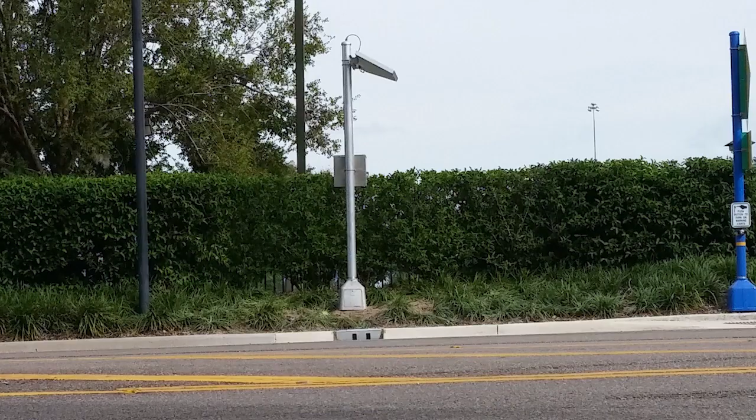Potential advantages of a turtle include the option to use solar power when obtaining utility service may be an issue. It can monitor multiple lanes of traffic without the need to be elevated on poles, and has detection zones that can be adjusted when lane striping is modified.

Innovate 680 is integrating many innovative strategies and advanced technologies for improving safety and alleviating congestion, such as express lanes, part-time transit lanes, and integrated corridor management.

Collecting accurate traffic data is essential to providing reliable, real-time traffic updates that will allow commuters to make informed transportation-related decisions and support data-driven decision-making by transportation agencies.

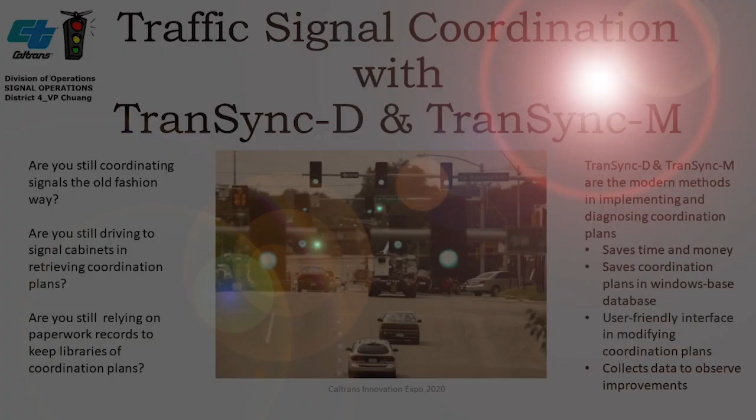Hello, this is Vanessa Chuang from Signal Operations Caltrans District 4. This is a presentation on coordinating traffic signals.

The process involves utilizing a software called TranSync-D and TranSync-M. This innovative method saves time and money, and most of all, organizes traffic signal coordination plans within a database.

So if you're still implementing coordination plans the old-fashioned way and documenting coordination timing on paper or separate data files, this software can reduce your field and office documentation time.

This is the summary of the presentation. I will discuss the following: What is TranSync-D and TranSync-M? Why is it a must-have tool for an everyday traffic signal operator?

I will then mention a successful implementation of a coordinated 5-signal system utilizing the innovative software with a data collection table to easily observe improvements through the corridor. Also, I will shortly discuss a basic step-by-step tutorial.

What is TranSync-D and what is TranSync-M? First of all, the D stands for desktop and the M stands for mobile. These are software products to efficiently manage, operate, and maintain traffic signal coordinated systems.

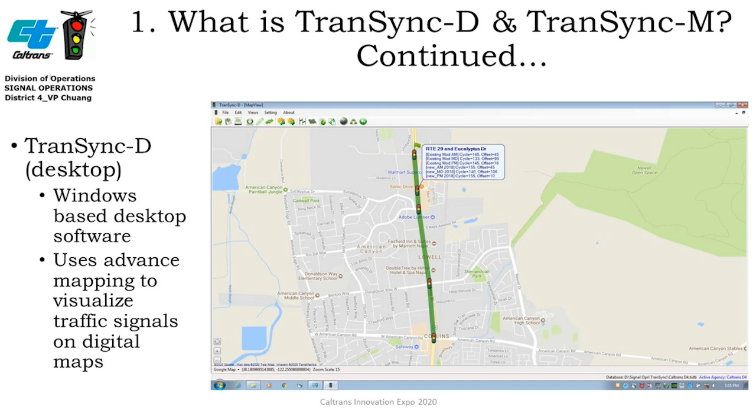So, Transync D is a Windows-based desktop software. It uses advanced digital mapping to easily locate traffic signals within the corridor. In this slide, you could see the several coordination plans within the digital map, which you can easily manage and edit signal timing by clicking on the traffic signal.

Also, the desktop software can produce reports which are called arterial performance reports that show the following data.

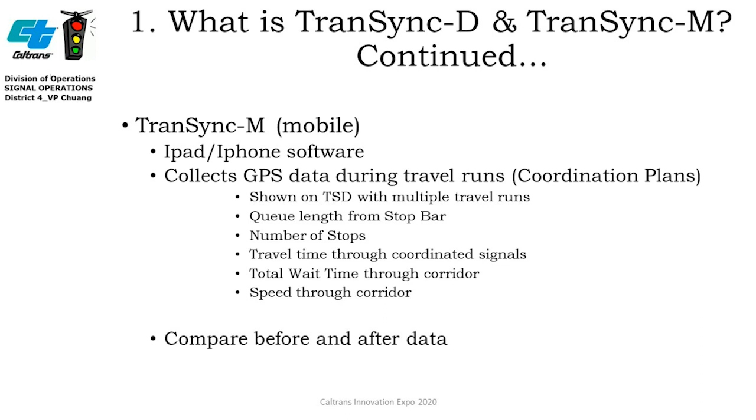Moving on to Transync M. The mobile software can be used on the iPad or iPhone. It is an app that can be easily downloaded from the App Store, which is a convenient tool to have in the field.

The Transync M is utilized to collect data from the field while driving through the coordinated traffic signal system. It can show multiple data on one screen to compare test runs, shown here on this slide.

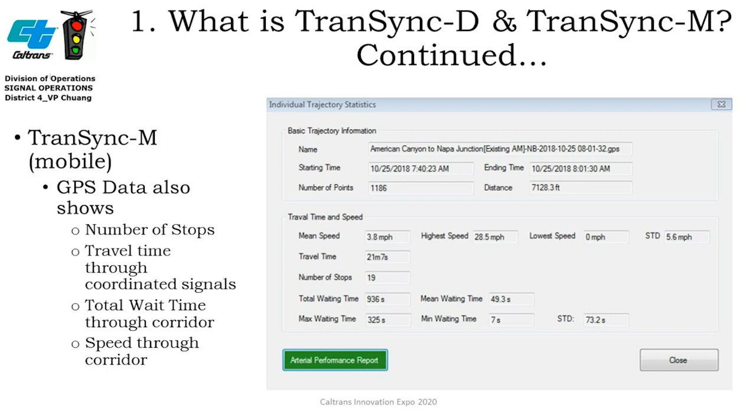Also, the mobile software can record timestamp detailed data, which are significant parameters to observe and to improve the mobility of the corridor. With this data, you can record onto a table for further analysis to compare existing and newly implemented coordination plans. Basically, use this data to show the improvements of the corridor.

So, why is this TranSync software a must-have tool for an everyday traffic signal operator? It's an innovative method in implementing and recording coordination timing plans of traffic signals. The software is user-friendly and convenient both in the field and in the office.

The cost and time savings can be shown by not needing any traffic counts to implement timing, nor output any level of service data.

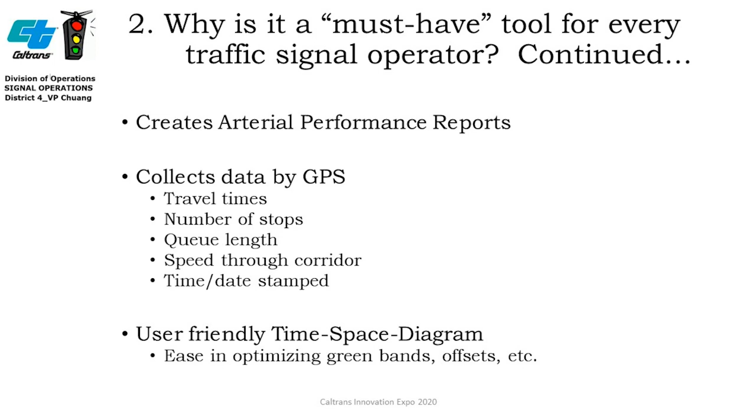Also, the software can create performance reports by analyzing timing alone. The software creates a database which can be modified anytime when coordination adjustments are needed.

Moving on to the example of a successful TranSync coordination implementation, the 5-signal system example was actually used for this presentation. The data and screen capture pictures in this presentation have been taken from the TranSync database. This demonstrates an easy and convenient innovative way in retrieving and organizing files of coordinated traffic signal systems, such data files that are critical in analyzing, modifying, and implementing timing plans in the field.

This innovative method makes record keeping easy and convenient to organize and retrieve data. Also, the record keeping leads to a faster response time in implementing new timing plans in the field, which also leads to time and cost savings.

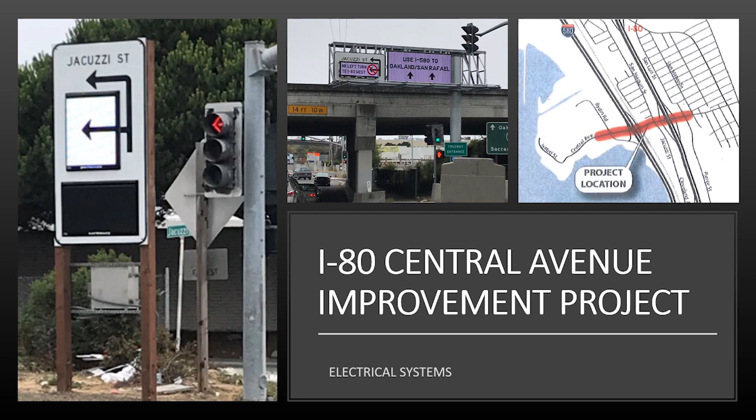The problem we faced was that this intersection has heavy congestion during the weekend peak hours. A redesign or modification of the roadway was not a feasible option. The solution was to use ITS technology to redirect traffic from the westbound 80 on-ramp to the westbound 580 on-ramp.

This is done by using dynamic variable message signs to display alternate routes during the peak hours on Saturday and Sunday from 11 a.m. to 3 p.m.

The benefits of this project have been cost savings as compared to redesigning the intersection. You can display both color graphics and text and replicate regulatory signs for future messaging needs. You can also dynamically inform the public of available alternate routes. The before and after study also showed improvements in overall traffic volumes and travel times.

This slide shows two photos of a typical variable message sign displays during heavy congestion periods. Thank you.